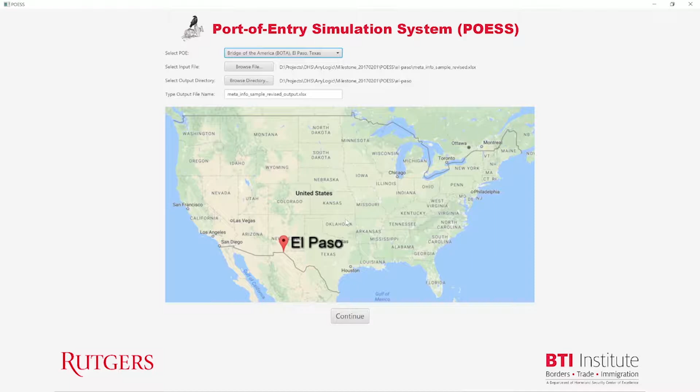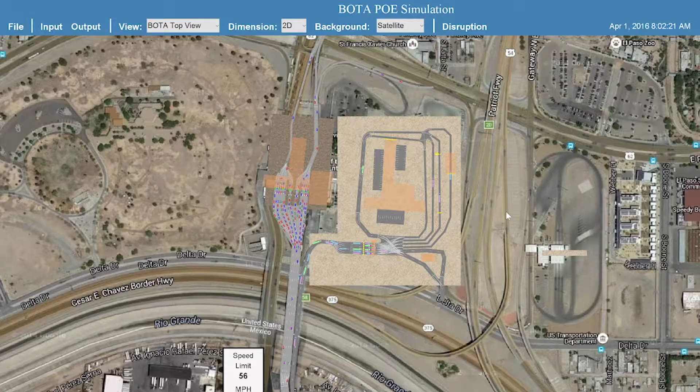The broad objective of the project is to provide a suite of simulation modeling tools that can serve to answer what-if questions. This suite of models has been dubbed Port of Entry Simulation System, or POESS for short. The screen shows the Bridge of the Americas, also known as BOTA, in El Paso, Texas, which will serve as a working example. The project creates a model using the AnyLogic simulation platform, which uses visual facilities for creating model objects and Java programming for specifying object behavior.

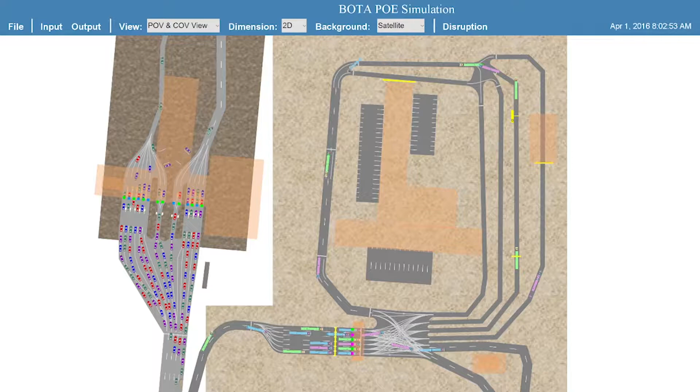Each port of entry model uses traffic animation at user-provided time granularities for detailed observation of how model scenarios unfold over time. Animation tracks the motion of each vehicle from the time it arrives at the port of entry until its departure. A port of entry model includes its layout on a geographical map.

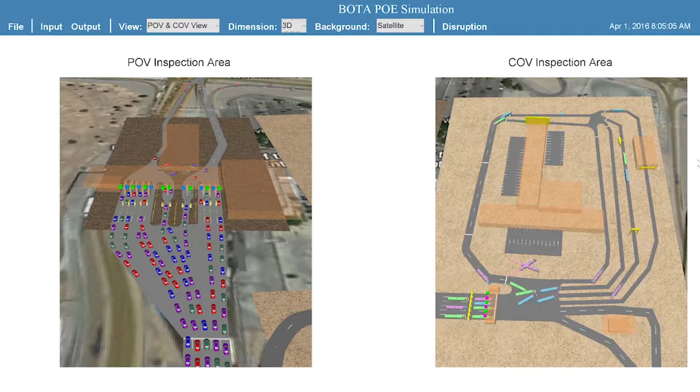Here we see a top view of the Bridge of the Americas. Zooming in for a closer view, we see that the Bridge of the Americas actually consists of two ports of entry, one for privately owned vehicles, referred to as POV, on the left, and one for commercially owned vehicles, referred to as COV, on the right.

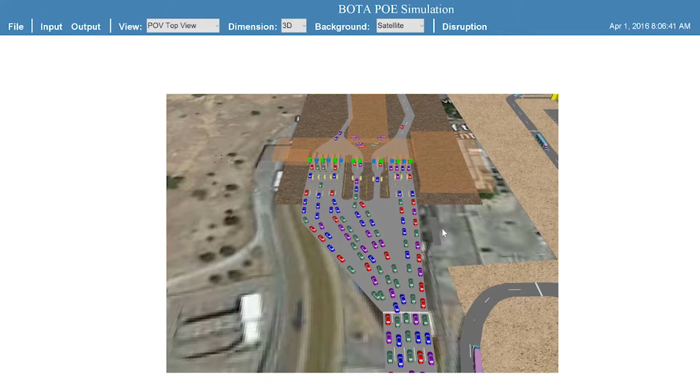The port of entry layout is captured by the simulation model specific to each crossing. For example, we see the privately owned vehicle layout with traffic moving northward. This crossing has multiple stages, including pre-primary inspection, primary inspection, and secondary inspection. A more detailed three-dimensional view of the privately owned vehicle lanes is shown in this figure.

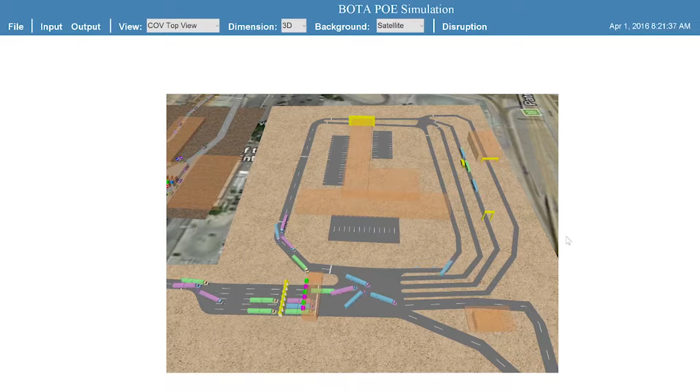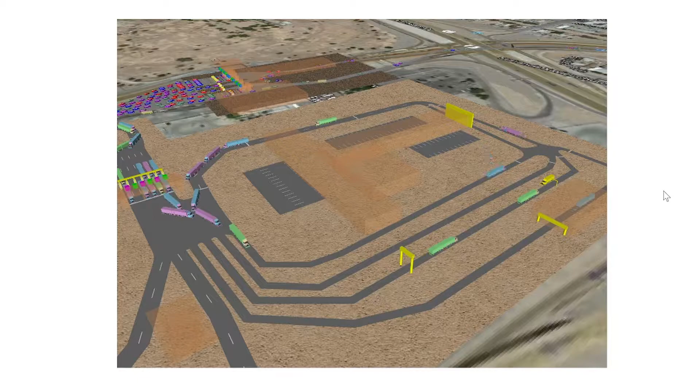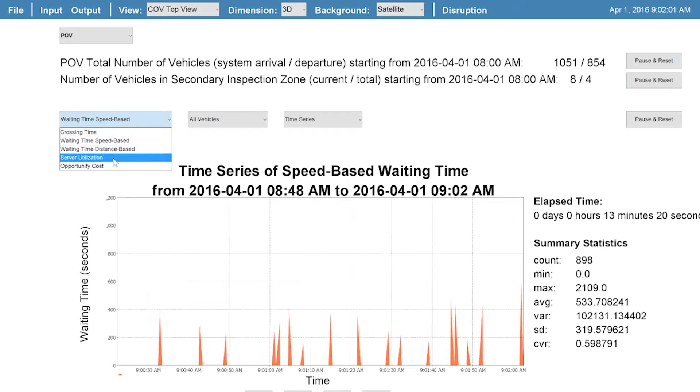A simulation model produces as output statistical estimates of performance metrics. Performance-related output that is of interest may include time series of waiting times and resource utilization, as well as their statistics. Such statistics include histograms, means, variances, etc. The port of entry model is configured by entering input parameters into an Excel file. Similarly, the simulation model saves its output in an Excel file for further analysis.

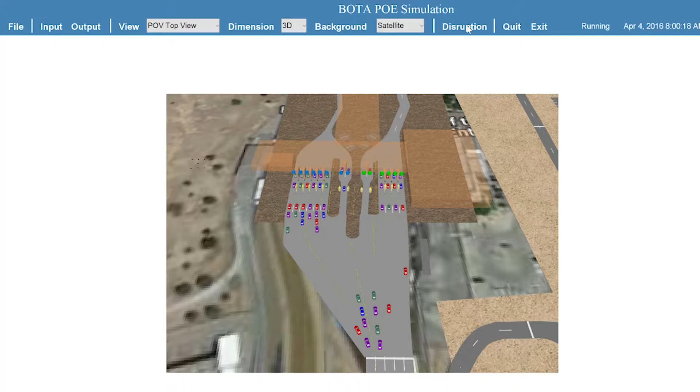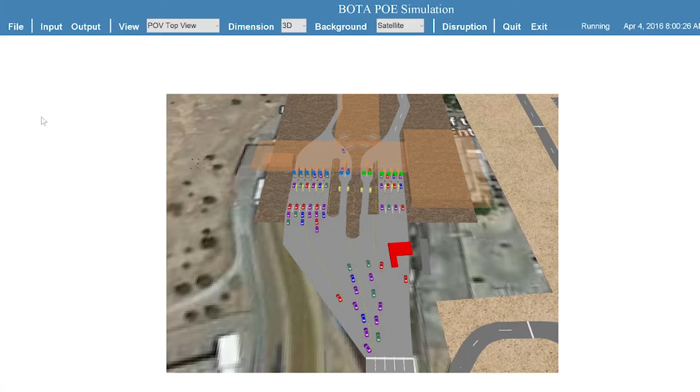An important feature of POE is the capability of simulating traffic disruptions. This feature allows analysts to create, turn on and turn off physical obstructions in a port of entry model which capture traffic disruption due to various adverse events such as car accidents or disablements, road construction, etc. The analyst can then gauge the resultant congestion and the dynamics of deteriorating performance measures, mainly waiting times. This ability would be useful for port directors as well as preparedness and response organizations.

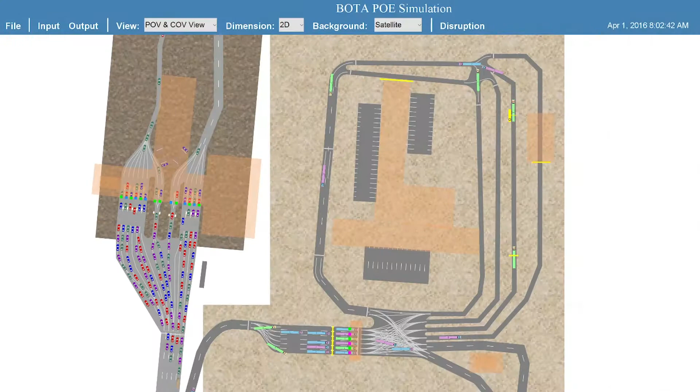A simulation system serves as an in vitro lab by allowing the analyst to conduct experiments with various port of entry configurations and parameters, primarily for planning purposes. A typical planning purpose might be to assess the benefit of opening additional lanes, adding personnel, or speeding up inspections based on pre-vetting of drivers. Other applications might be preparedness planning to assess the impact of a surge in traffic due to a natural disaster, an industrial accident, or another type of emergency or traffic disruption.

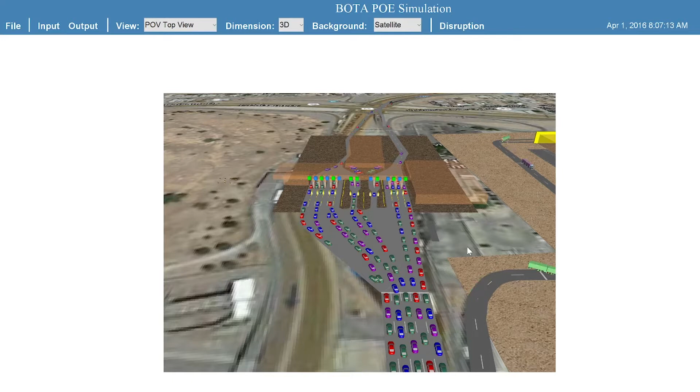The Bridge of the Americas model is the first of several that the Rutgers team will create for Customs and Border Protection as part of its project. For questions and additional information, please contact the principal investigator.